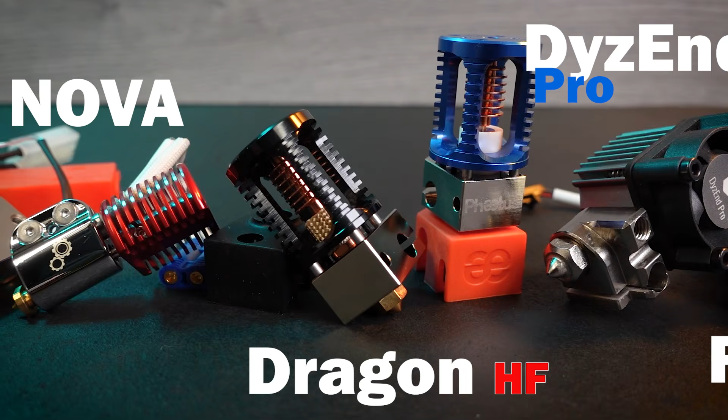We have access to a very wide selection of hot ends to serve our need for speed. But which hot end is the one you really need? From this very wide selection, it can be quite confusing to select the right one for your printer and for your needs.

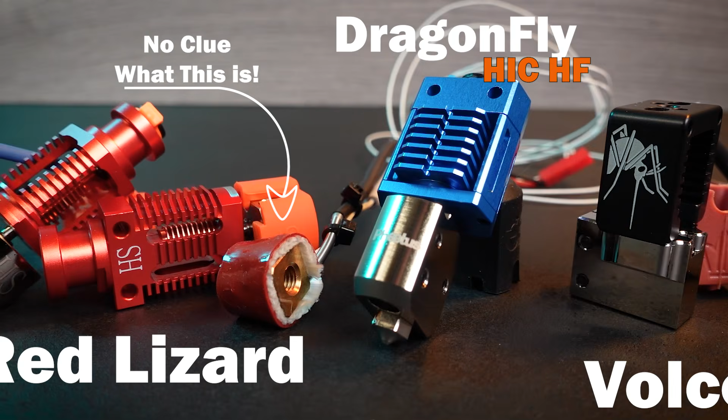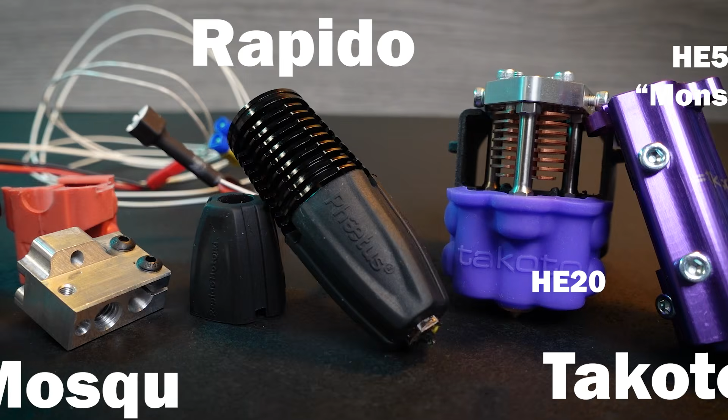Some hot ends will focus on flow, others on lightweight, small form factor, easy maintenance, and a lot more characteristics. To help you in this selection process, I am proposing today a series of videos in which I will try to identify and quantify the characteristics by which we could evaluate every hot end available in the market, and perhaps future ones also. These evaluation points should tell us more about which hot end is right for your needs.

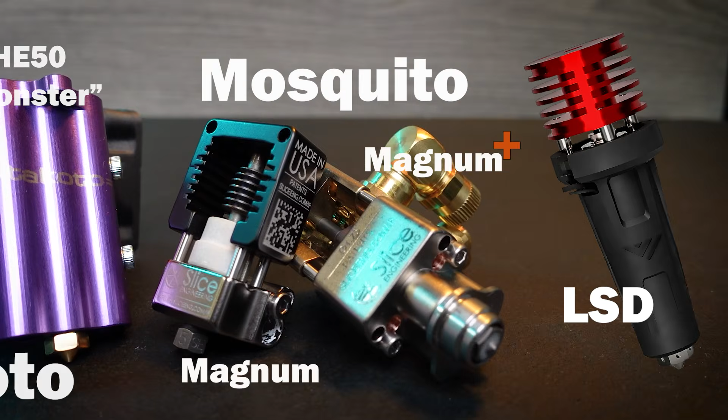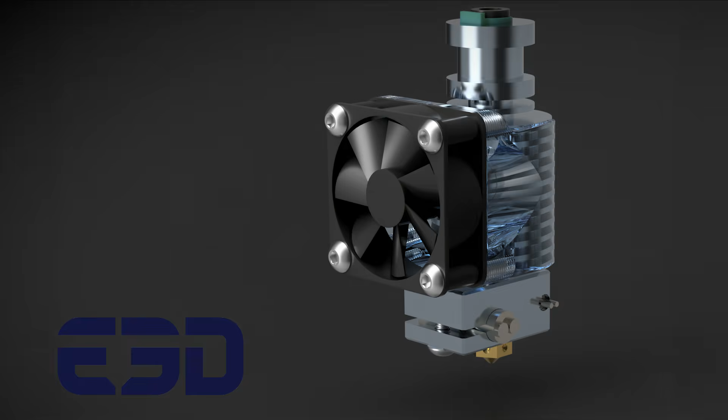For this very first episode of the Hot End Olympics, I propose that we have a look at the testing methodology and the results format. What better test candidate than the E3D V6 hot end as our guinea pig to understand and baseline each test?

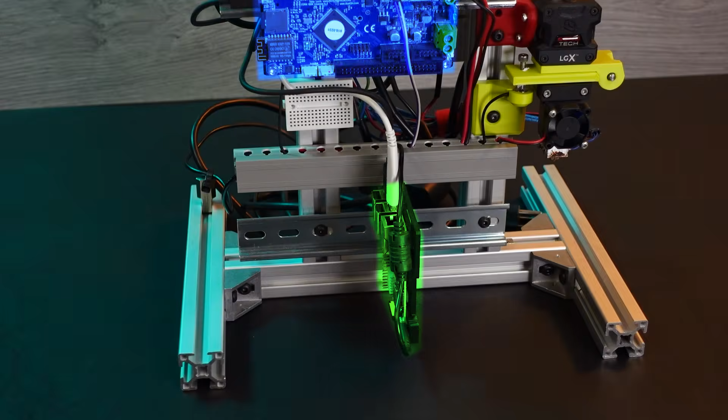Let's have a look at the test rig. The installation is fairly simple. A 24-volt power supply feeds a Duet Wi-Fi control board running Klipper. The Raspberry Pi is obviously required for Klipper, and we have right here a Bondtech LGX as the extruder. That goes for the easy part.

Then we have measuring devices. The first one is a rotary encoder to measure the amount of filament going into the hot end. Then we have right here a very precise pressure sensor that will be measuring the force at which the filament is being pushed into the hot end.

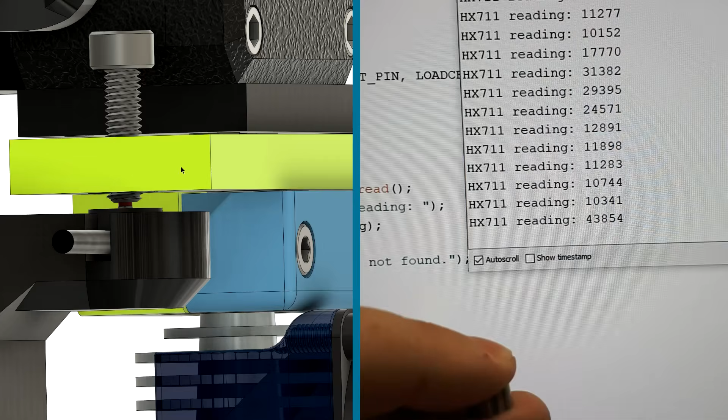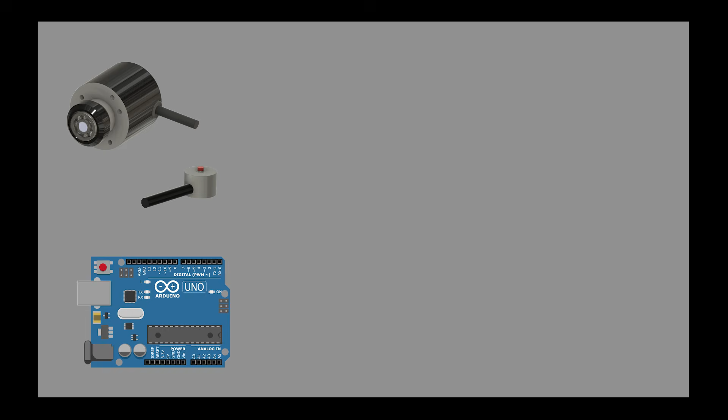The entire hot end assembly is mounted on a hinge with very limited friction for accurate readings. Both sensors' readings are then being captured by an Arduino and fed to the Raspberry Pi to be logged along with the nozzle temperature in a data table.

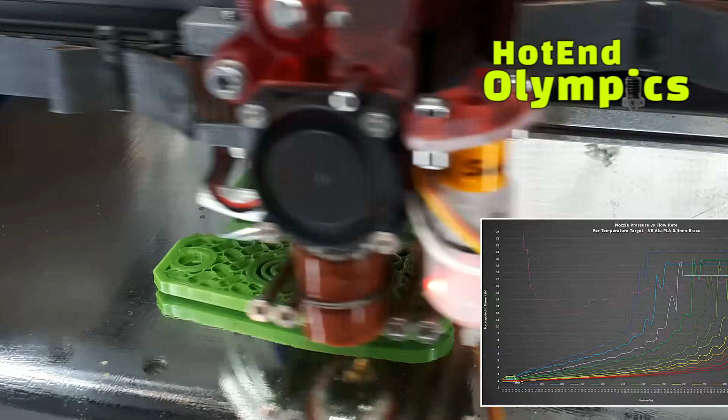Not only will it define the maximum flow under manageable pressure levels, but this test rig will also reveal stuff we never thought of or did not even believe was actually happening in our hot ends.

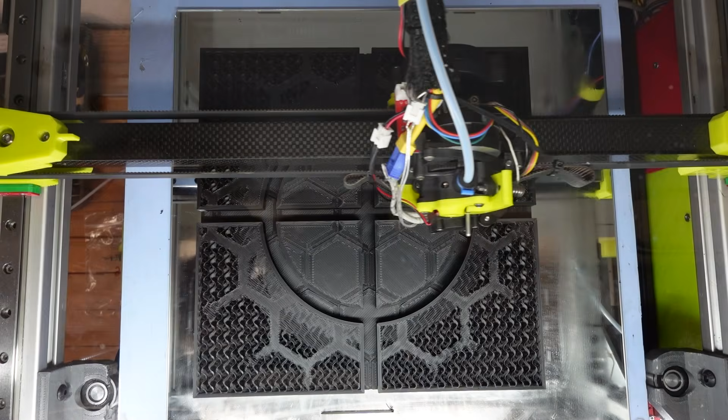Because we also need to move this entire system around the X and Y coordinate plane, we will measure its weight as well as the distance between its center of gravity and the point of fixation to the print head. With all this data in hand, it should become much easier to compare hot ends between each other.

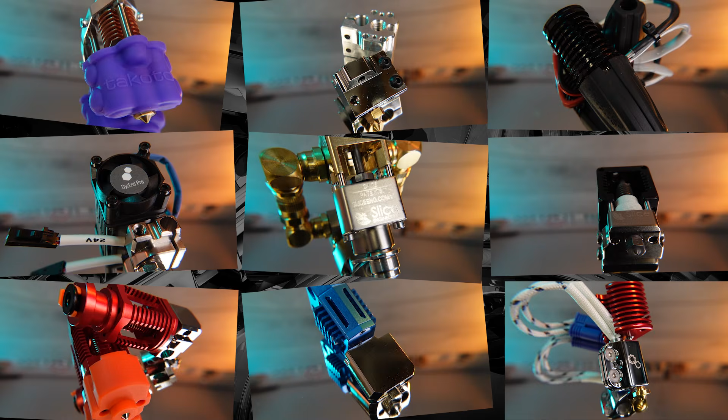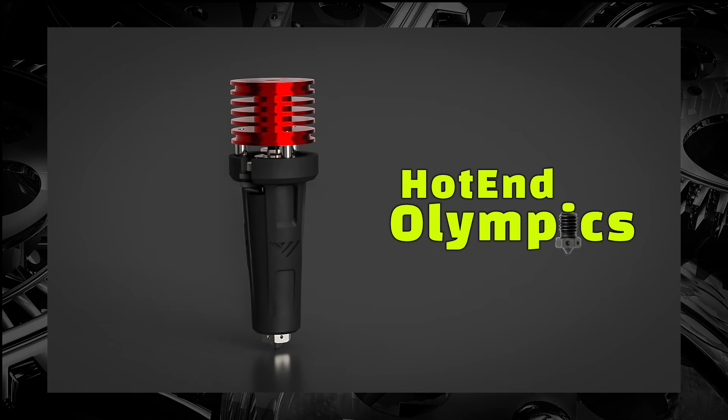Just like one of my favorite shows did many years ago, a ranking chart will be putting the winner of this competition to the top while welcoming new contestants at each episode. So let's try this testing process with our guinea pig, the E3D V6.

The V6 hot end has been E3D's flagship hot end since 2014. Affordable, efficient, and reliable, this configuration has established a standard within the industry. Any other company offering hot end products or parts had to be compatible with the V6. Nozzles, heaters, thermistors, heat breaks—pretty much every aftermarket part available today is compatible with the V6.

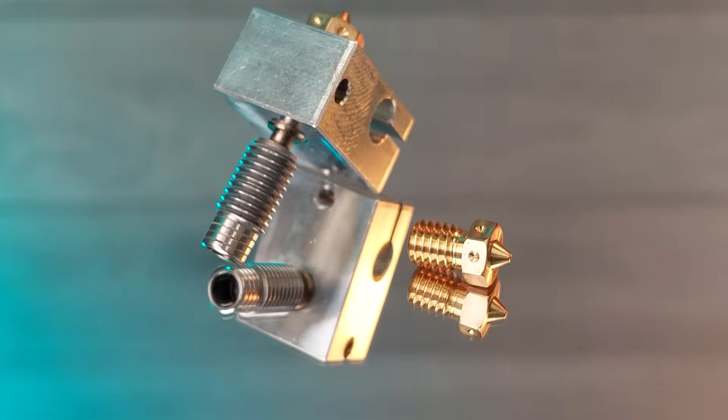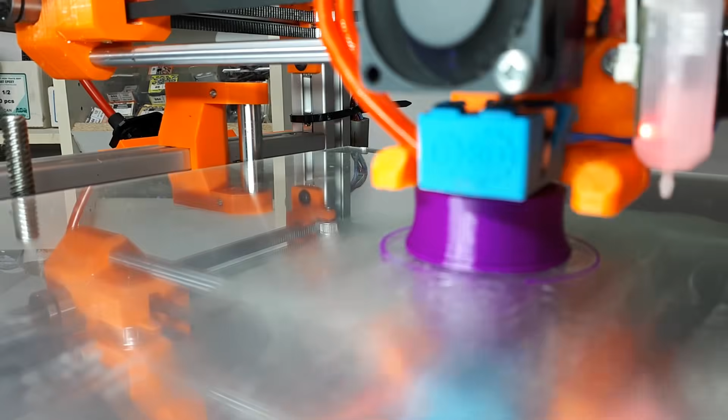Is the V6 still a good candidate for speed printing? Let's find out. The unit we're going to be using today is a pretty used unit. It has served me well on my Hypercube Evolution for years. It is equipped with a standard 30-watt 24-volt heater cartridge and a titanium heat break.

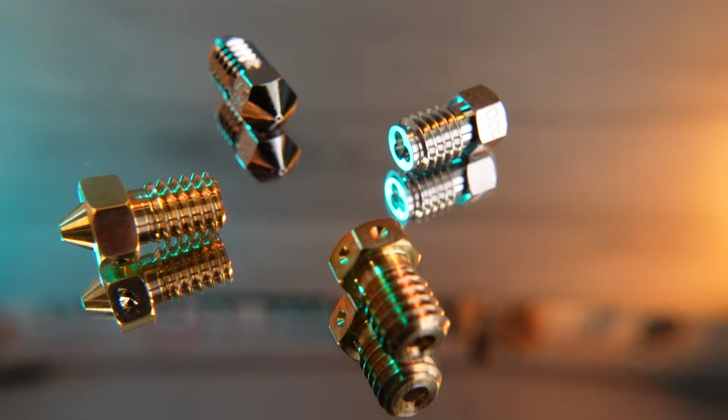We will be testing its performance sporting a 0.4mm nozzle as well as a 0.8mm nozzle later on. Before we start with performance testing, let's review the physical properties of this unit.

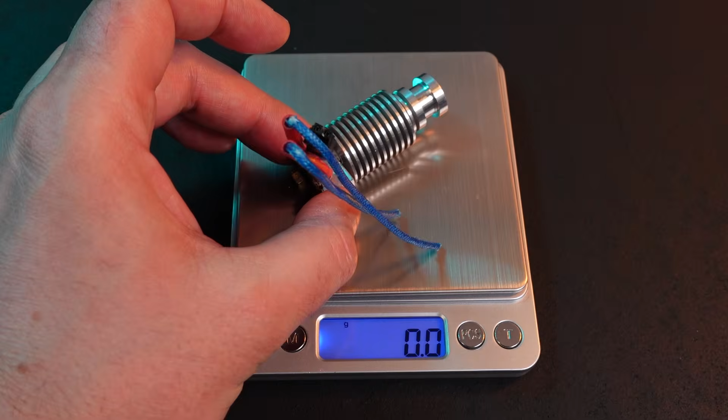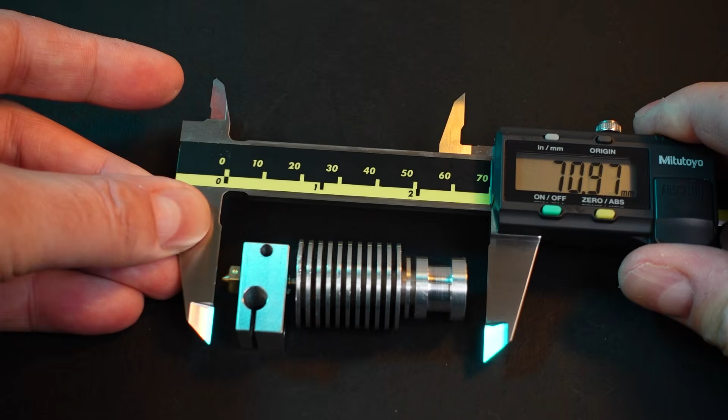All loaded with the heater, the thermistor, and some wire length, our V6 weighs just short of 42 grams. Adding the fan and shroud brings us to 56.9 grams. It has a length of 70.97 millimeters, and the melt zone measures 17.5 millimeters from the tip of the nozzle to the throat of the heat break.

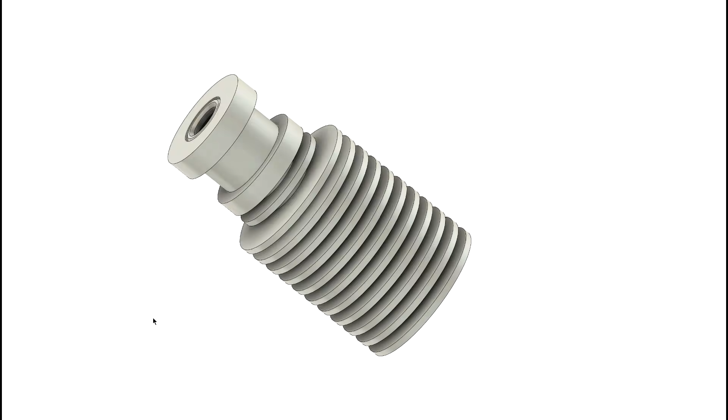The heatsink is pretty long, with plenty of cooling area within its fins, and the big 3010 fan helps a lot with cooling. The heater block is made from aluminum and is retained by the heat break only. The heater cartridge is perpendicular to the melt zone, and the melt zone is located between the heater cartridge and the thermistor.

This ensures accurate readings of the nozzle temperature.

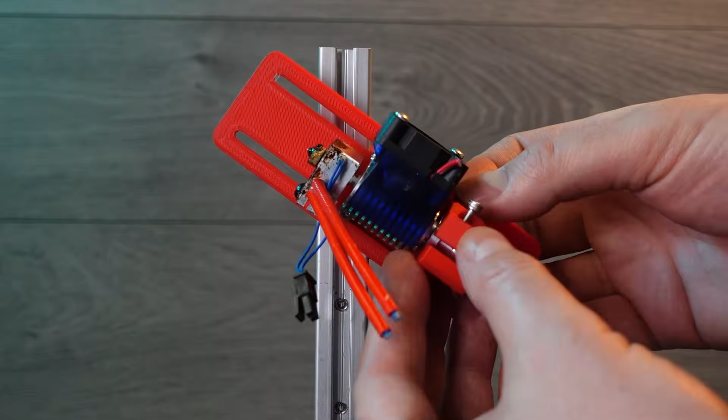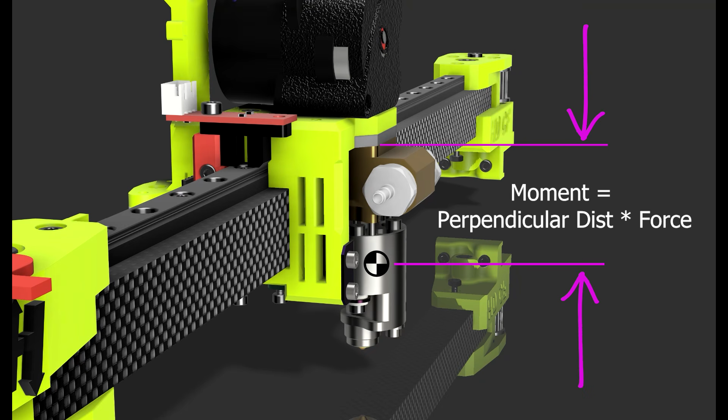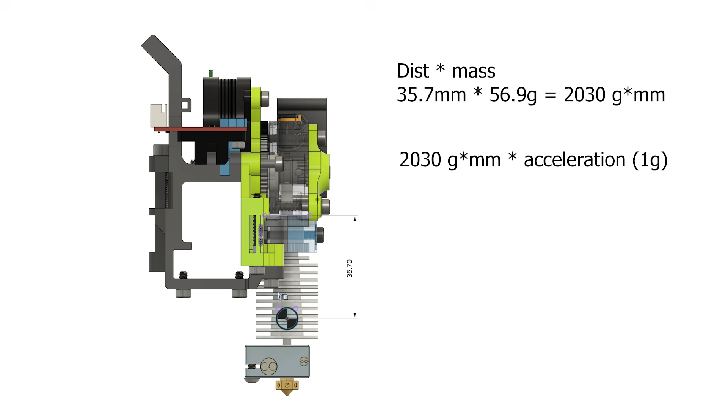By using this small jig, we'll be able to find the center of gravity of our assembly. Finding the center of gravity will help us in establishing the moment of force produced by the application of the assembly's weight on the lever defined by the distance between the center of gravity and the mounting point to your print head. The moment value obtained in Newton centimeter will give us a good basis for comparing hot ends between each other. This assembly has its center of gravity at a distance of 35.7 mm from its mounting point. Multiplying this distance with the weight of our assembly, we obtain 2030 gram-millimeter. Then converting grams to Newton and millimeter to centimeter, we obtain 1.99 Newton centimeter.

This means that under a 1g acceleration from back to front move on the y-axis... oops, sorry about that. I should remember that I'm talking to a 3D printing audience.

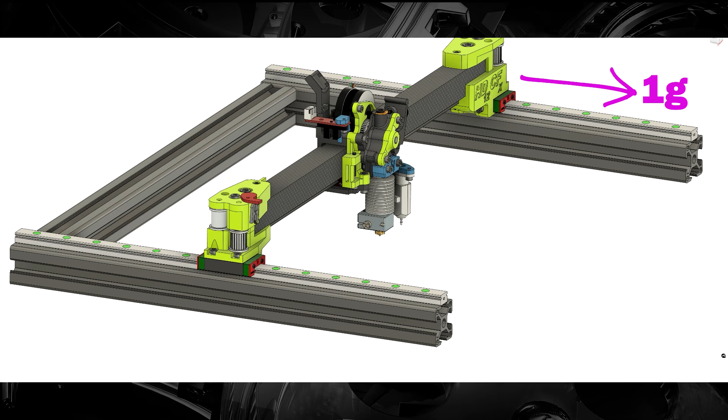Let's start that over. So this means that under an acceleration of 9,806.65 mm per second squared on the y-axis, the V6 will apply a rotating force of 1.99 Newton centimeter on its mounting point. You can now easily understand that if we increase the weight or increase the length of this assembly, we also increase the twisting forces applied to your print head, resulting in potential artifacts on corners and sharp edges during fast printing.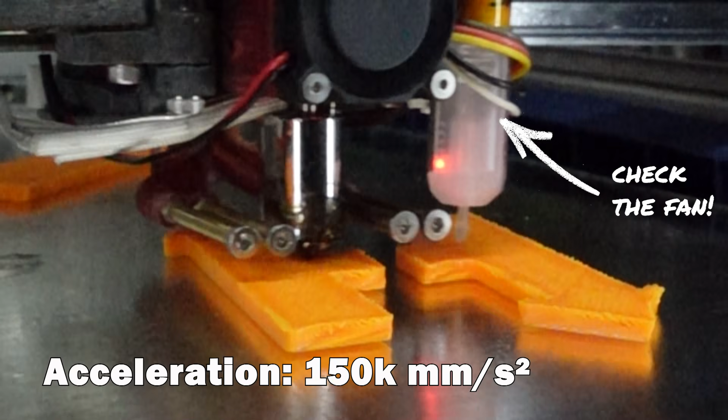And now, here comes our main course, the flow testing. The test plan is to make an extrusion run on the test rig for every 10 degrees Celsius increment. The extrusion rate will be increased progressively during each run until the extruder skips steps or when the filament starts slipping. Along with the quantity of material being extruded per second, the pressure sensor is recording the amount of force utilized to push the filament inside the hot end.

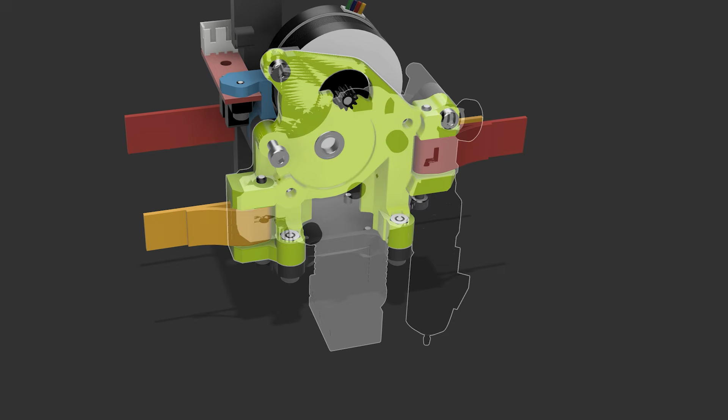Additionally, because I'm a bit crazy, and you should know that by now, and I also have way too much time on my hands, wink wink, I feel that I should also design a print head for each hot end and validate the maximum flow with actual printing. And yes, for each material and each of the two nozzle sizes as well.

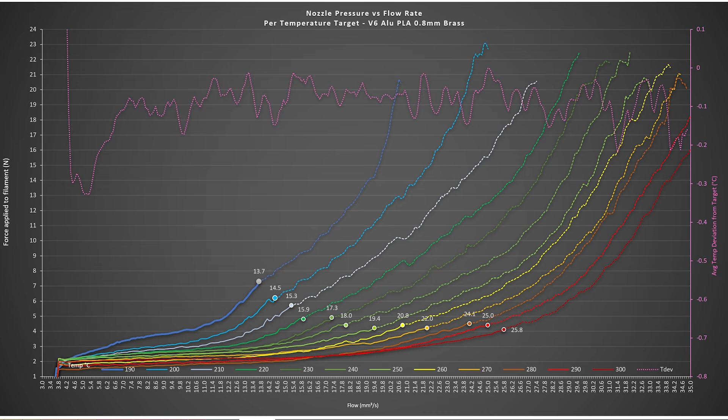The test rig conditions could be misleading under some circumstances, and we'll see why later on. The actual printing is going to help us clear that out.

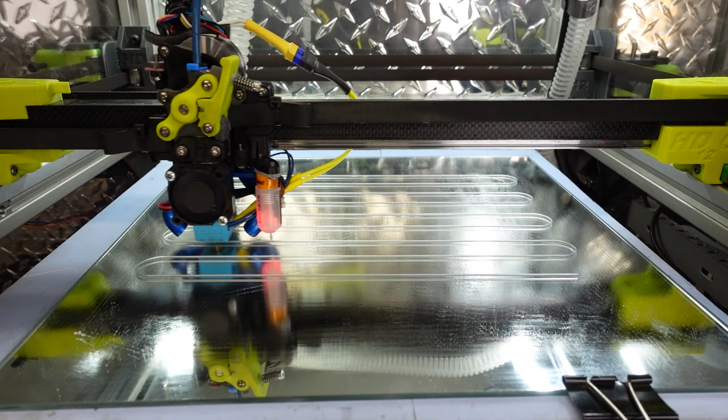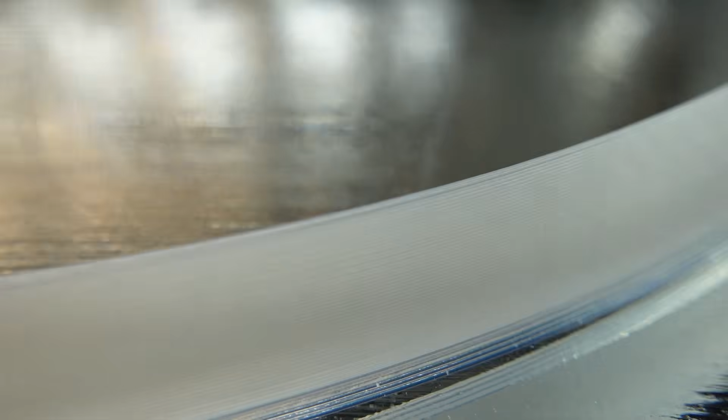I am reusing the pattern from my good old friend Vez 3D for this test. While this pattern maximizes the amount of straight lines on the same layer, it also limits the amount of flow disruption from sharp cornering, and it also allows each layer to cool properly. Thanks, Vez. The print speed will be increased at each layer until the print quality becomes unacceptable.

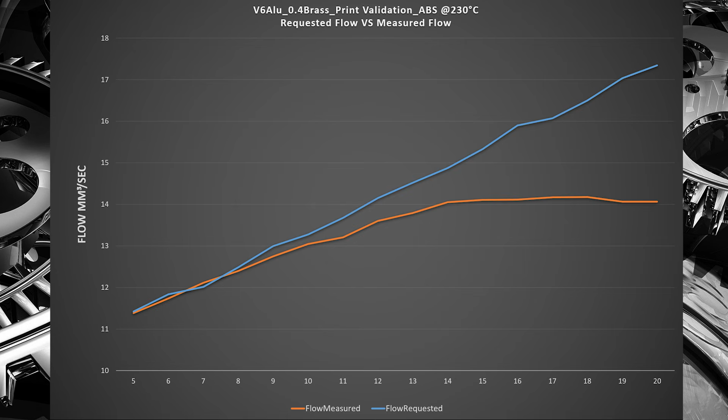The same type of rotary encoder as on the test rig is also going to be used to record the actual amount of filament going through the hot end. By comparing the amount of filament requested by the G-code and the actual amount measured by the encoder, we already have an idea of where the breakpoint will be.

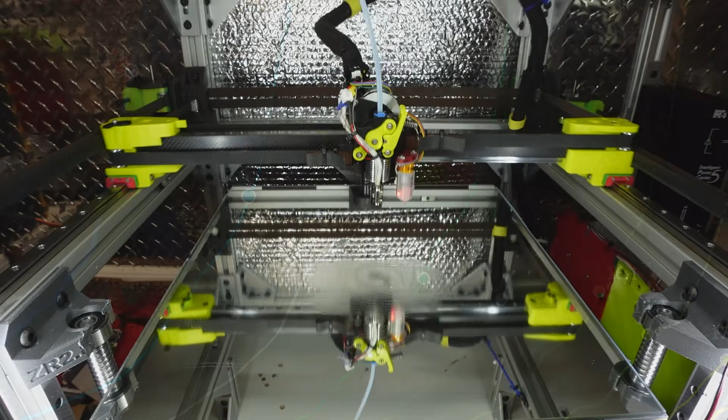Unfortunately, I did not find a way to mount the pressure sensor on the print head without obtaining too much noise and unreliable data due to the hot end swinging around under hard acceleration and direction changes. So this is something to keep in mind when we review the data.

I really wanted to test the maximum flow during actual printing to resolve a few questions that I have. Can we still print properly at the ultimate maximum melting capacity of a hot end? Will the increased pressure inside the hot end caused by the printed part partially obstructing the nozzle contribute to augmenting the melt zone height? And is there a pulling effect from the filament getting grabbed by the material previously laid, and therefore helping it get out of the nozzle?

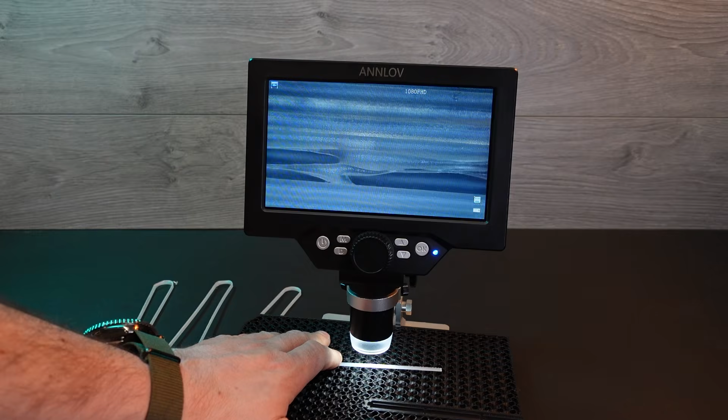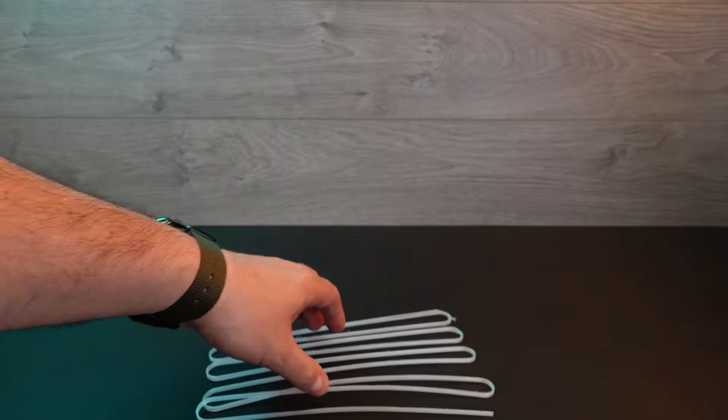I don't pretend to have all the answers to these questions yet, but I'm convinced that the observations we will be making during these Olympics will greatly improve our understanding of what's really happening in our hot ends. I will focus on these topics in additional videos that will be published between the various episodes of the Olympics to further explore or explain some of the observations made during these tests.

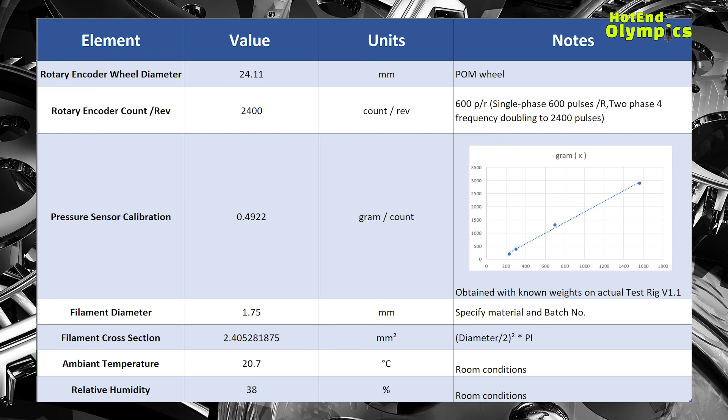Now that our test rig and printer are calibrated, and the test environment has been documented, we can dive into our first results analysis. Let's see what the V6 using a 0.4mm brass nozzle can give us when using PLA.

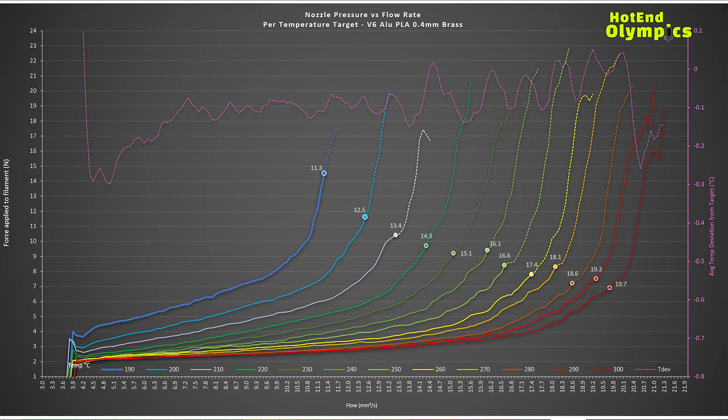There is a lot of information here, so it can be confusing at first. Let me break this down into pieces for you.

The bottom axis represents the material flow in terms of cubic millimeter per second. On the left axis, we have the amount of pushing force applied to the filament. This force is expressed in terms of newtons. On the right part of the graph, we have a second vertical axis. This one represents the average temperature deviation between the targeted nozzle temperature and the actual measured value.

The pink dotted line here shows this temperature deviation in relation to the flow obtained. The dip at the beginning is normal. It is simply due to the fact that the nozzle temperature was stabilized at the targeted value before the test started.

We can then see the controller board trying to maintain that value as stable as possible using its PID algorithms as we push more and more filament. It tends to keep the temperature slightly under the target, probably because we are constantly increasing the flow of material to be heated up. The oscillation at the end indicates that the heater has a hard time to keep up. The PID tune is probably not optimal for this flow, and the dip at the end probably indicates that we are outrunning the heater's capacity.

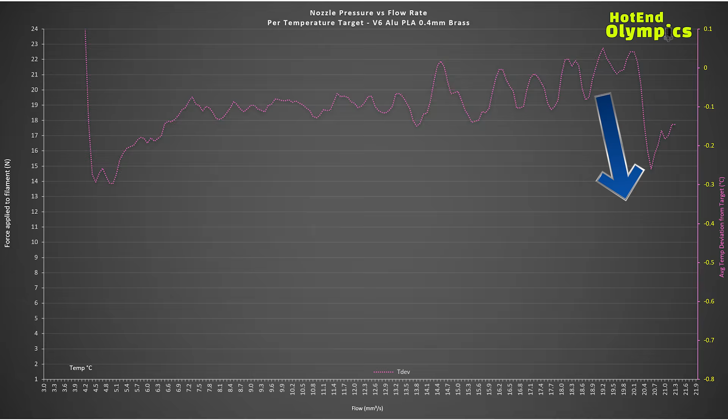Let's turn on the test sequence performed at 220 degrees Celsius, which is a pretty common printing temperature for PLA. As we increase the amount of filament pushed, we can see that the force applied by the extruder on the filament is also increasing. This means that the pressure inside the hot end is increasing as well. So far, we have a pretty linear pattern, which indicates a stable and predictable situation.

Let's see what happens when we try to increase the volume of filament pushed furthermore. We're reaching a point where the pressure starts to climb much more rapidly, until we have an almost vertical curve. If we were to try exploiting this range of flow at this temperature on this hot end, we would get an erratic extrusion flow very difficult to properly predict, therefore throwing out of whack your retraction and pressure advance settings.

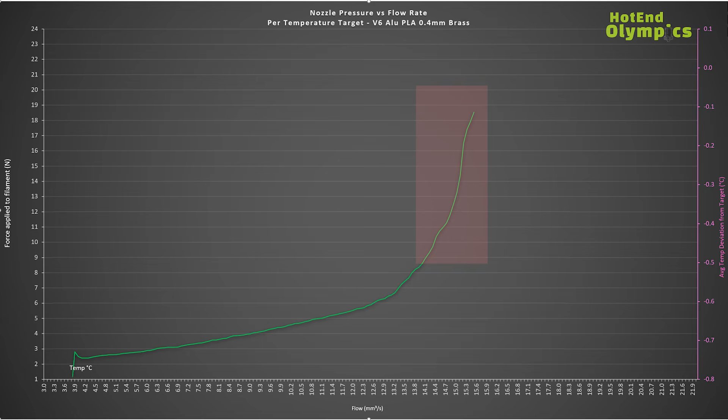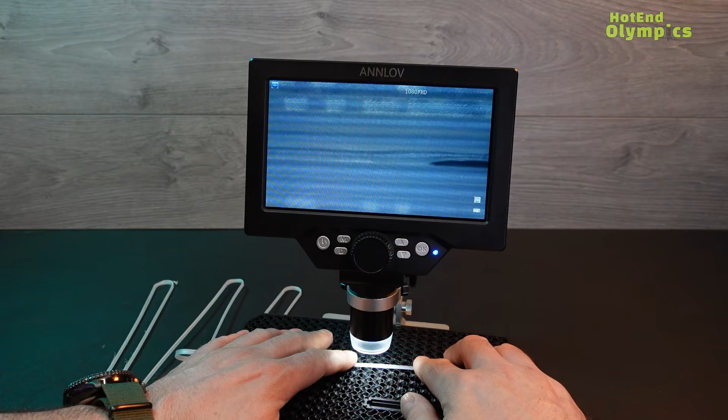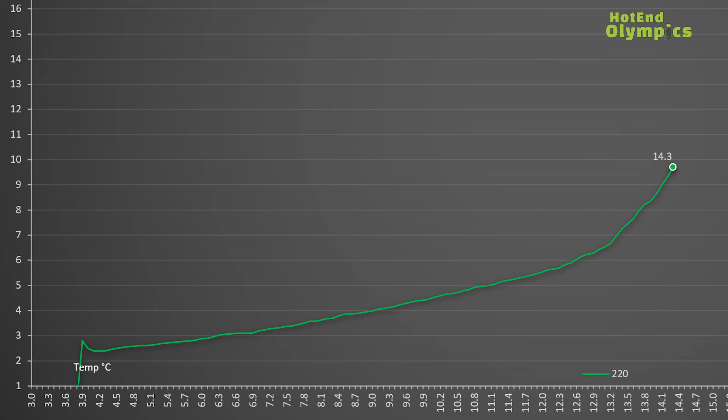By measuring the last height of our test profile that printed correctly, we can then pull the readings from the rotary encoder. It is too bad I couldn't find a way to obtain reliable data from the pressure sensor when mounted directly on the print head, so we will simply report the maximum printing value on this graph, knowing that the pressure profile might be slightly different when printing for real than what it showed on the test rig.

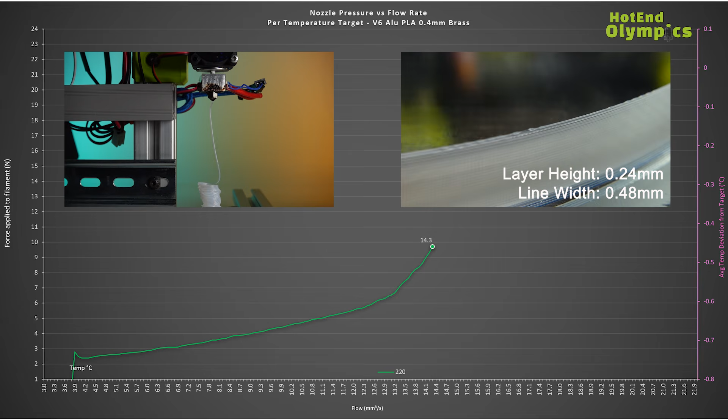So at this temperature of 220 degrees Celsius, the last layer that printed correctly corresponds to a printing flow of 14.3 cubic millimeters per second.

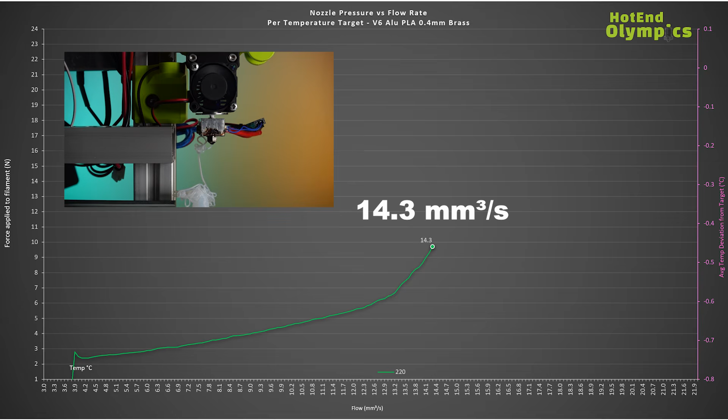This maximum printing flow value corresponds directly to the area of our test rig curve where the pressure was starting to creep. This means this testing methodology might be working after all. The rest of the curve from that point on will be dashed to indicate the non-printable zone.

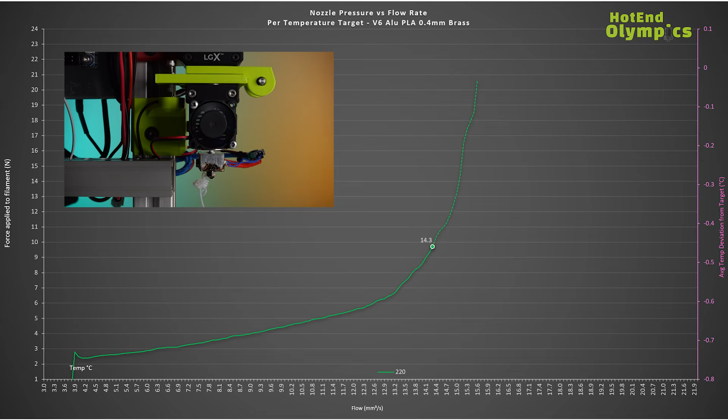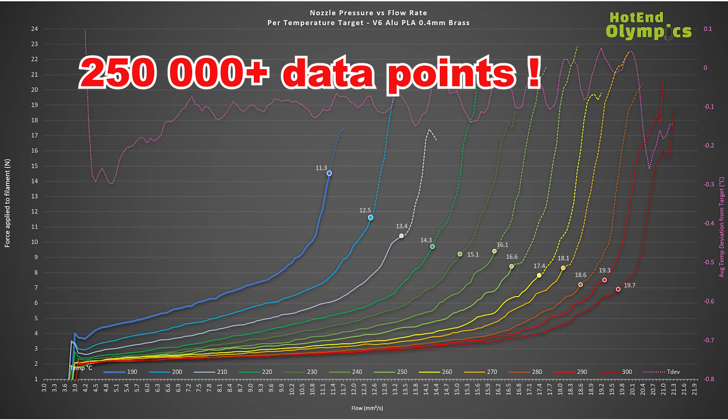Let's turn back on the other test sequences done at other targeted temperature values. What a cool graph! More than 250,000 data points were used to create this image. Crazy when you think about it.

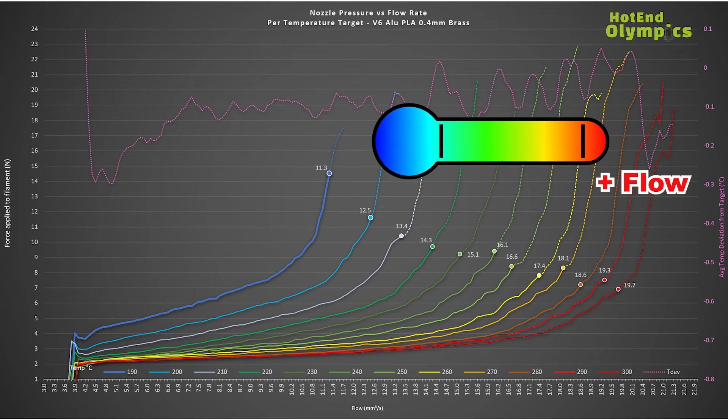So let's take a step back. What can this graph really tell us? It is clearly visible that more heat will increase the allowable maximum flow of our hot end. Given that we can properly cool the filament after being extruded, we could gain a lot by printing hotter.

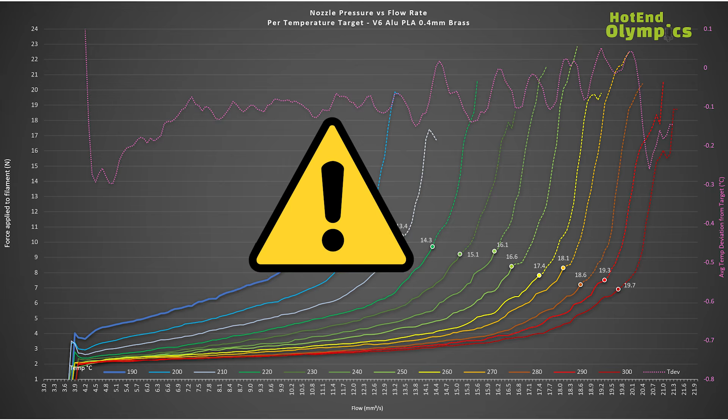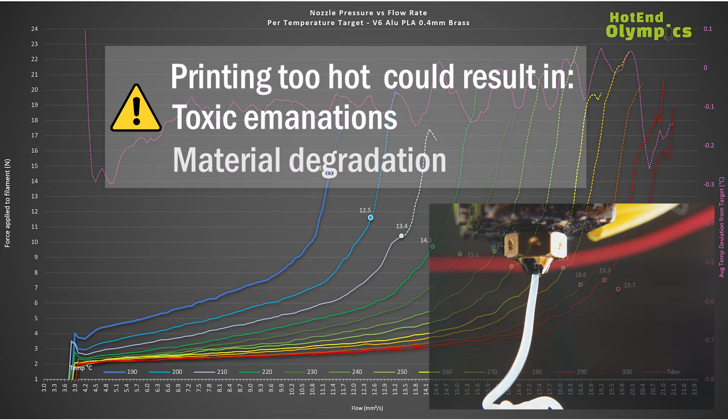But be careful. Printing a material at a hotter temperature than the value recommended by the manufacturer could mean two things. First, you'll start to get more undesirable toxic fumes. And second, you'll potentially be degrading the physical properties of the filament. This could mean weaker parts.

The pattern traced by those maximum printing flows reminds me of something. Do you see it as well? Yes, the max torque per RPM for our little NEMA 14.

We could potentially be able to obtain a bit more flow for this filament by using a stronger stepper motor. But then again, the gain wouldn't be much as the pressure creep zone is still around the corner for every single one of those points.

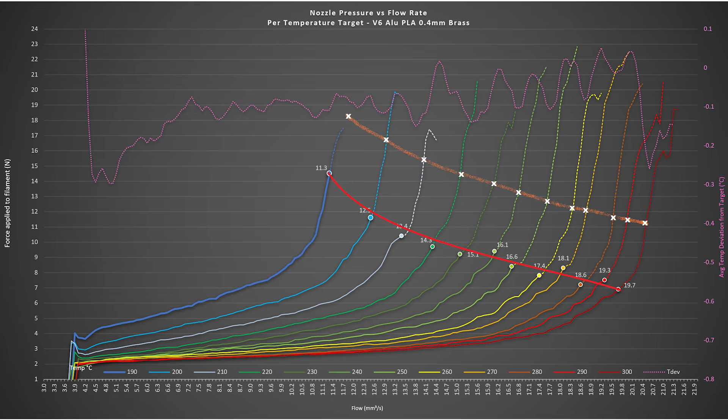Because we need to pick one value for our wall of fame, we will use the flow obtained at 220 degrees Celsius, which is the maximum recommended temperature for this PLA. Along with the maximum flow, this wall of fame will also list the physical properties of each unit. This way we can easily compare all hot ends based on different factors.

Our V6 using a 0.4mm brass nozzle has a total weight of 56.9 grams. The center of gravity is positioned at a distance of 35.7mm from the mounting face. This produces a moment of 1.99 Newton centimeter.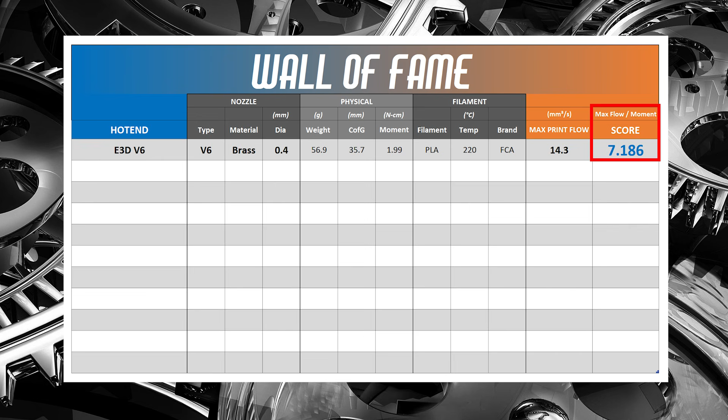A maximum flow of 14.3 cubic millimeters per second was measured via actual printing using Filaments.ca EconoFil natural color PLA at 220 degrees Celsius. I will take a stab at creating an index using the maximum flow divided by the moment. This index will be used to compare and rank hot ends between each other by considering their physical properties as well as their maximum flow capacity.

It might not be the best way to do it, but we will readjust as required along the way of these Olympics. Having the data in hand gives us such flexibility.

Please remember that I'm learning just as much as you guys in this adventure.

Let's stick with PLA for a moment and see how a 0.8mm nozzle will affect the results. Although the pressure curves from the test rig are shooting through the roof of flowing capacity, the actual printing maximum flow is considerably lower, just a little bit more than what we got with our 0.4mm nozzle.

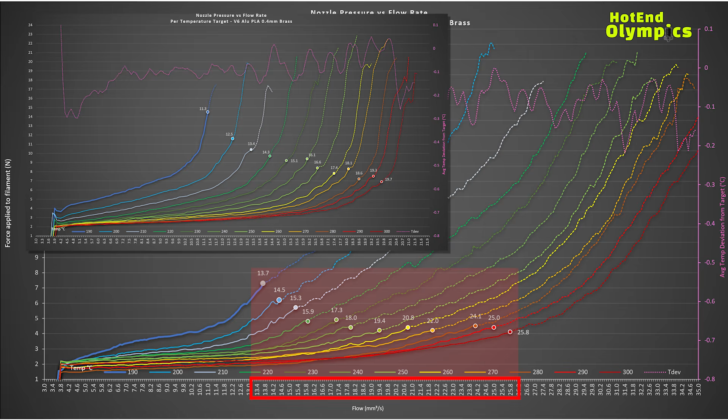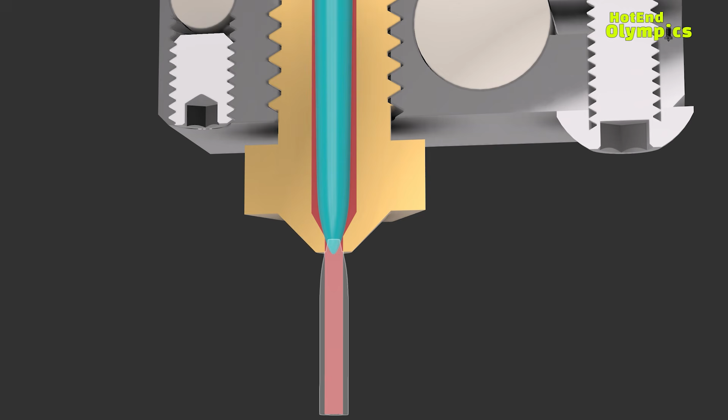The explanation for such difference between mid-air extrusion and actual printing results is caused by cold core extrusion. What is that? When reaching a certain pressure level inside the nozzle, it becomes easier for the unmelted center of the filament to simply deform, stretch, and squeeze through the bigger nozzle hole than it would take to block the nozzle and create enough restriction and pressure to eventually stall the extruder motor.

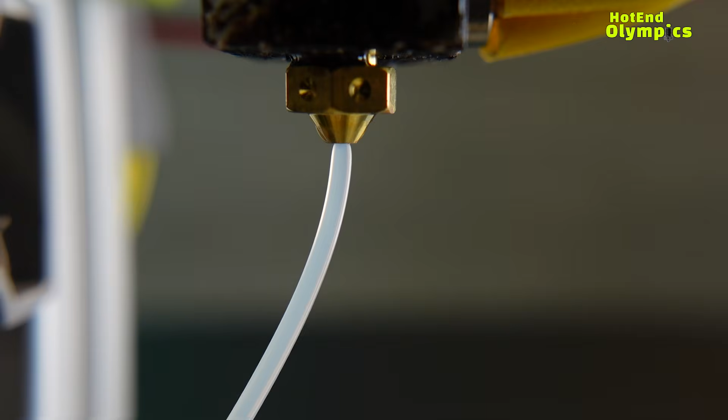We can observe and confirm this phenomenon by measuring the filament after extrusion. The filament gets swollen right after exiting the nozzle. This 1.58mm extruded piece was created using a 0.8mm nozzle. There is definitely an elastic motion happening here. Another way to observe that phenomenon is to look at the cross-section from one of these swollen extrusions. See the different texture from the center of this piece compared to its surrounding.

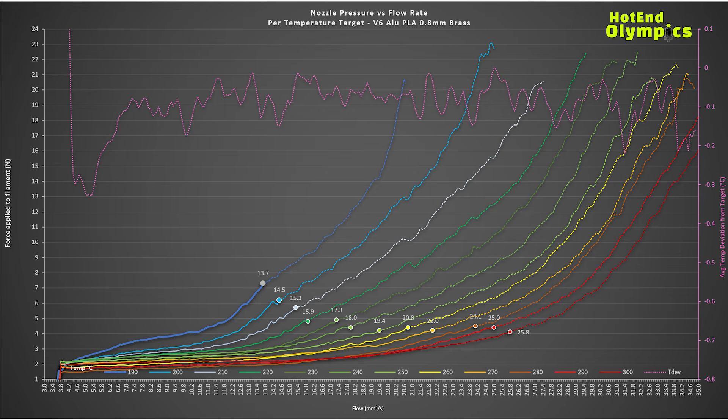For this reason, it became clear to me that actual printing was required to establish the real flow capacity of a hot end. I have used a line width of 1mm and a layer height of 0.48mm with this 0.8mm nozzle. There might still be some of that cold core extrusion phenomenon happening, but I evaluated this to be minimal since we are within reasonable range of the results obtained with the 0.4mm nozzle.

Now let's see how changing filament material affects the results. This is now ABS, a completely different pressure profile for this material. I could not get the test print to work below 220 degrees Celsius with the ABS due to bed adhesion issues. This is why the lines are completely dashed for the temperature curves below that point.

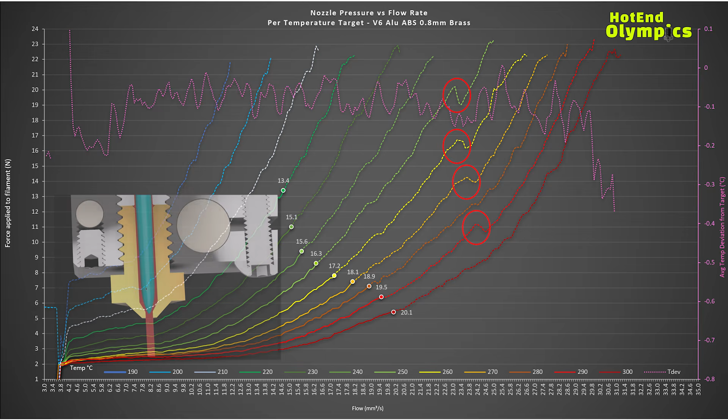Although we can see that ABS pressure progression curves are smooth and much more regular than what we saw with PLA, there are some things I cannot explain yet, like these spikes repeating through several test runs when using the 0.8mm nozzle. They might be related to the cold core of the filament making contact with the taper surface of the nozzle. If you have hypotheses that could explain these behaviors, please leave a comment here below. I'm eager to read these results through a different eye.

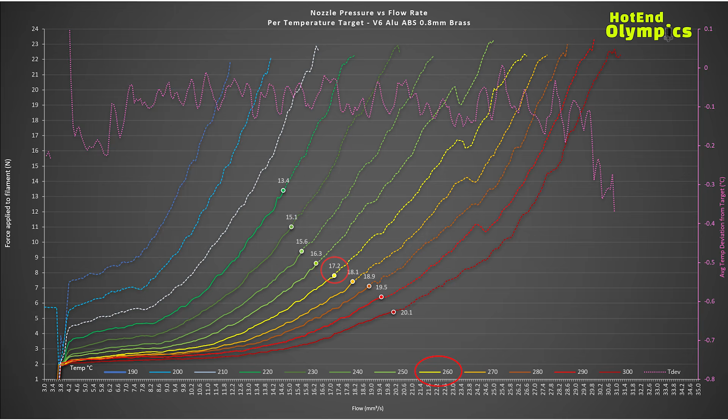We will use the maximum printing flow at 260 degrees Celsius for ABS. So using a 0.4mm nozzle, our V6 has a throughput of 15.1 cubic millimeter per second. And when using a 0.8mm nozzle, this maximum printing value becomes 17.2 cubic millimeter per second.

Last material, PETG. PETG is perhaps the more flexible and elastic filament from the three we are using in these Olympics. The pressure curves are pretty different from PLA and ABS. I suspect the more erratic and harsh texture of the curve is created by the filament taking the shape of a snake or a coil in the hot end under the push from the extruder motor. I could be wrong, but this is the only thing that makes sense to me right now.

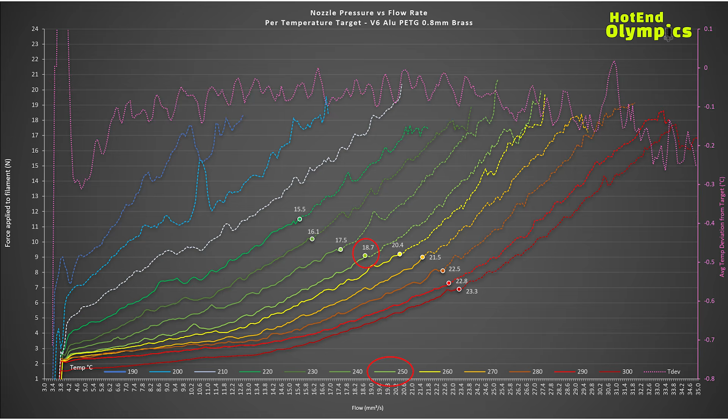Because we can only use one temperature value for our wall of fame, we will capture the maximum flow at 250 degrees Celsius. This is the temperature that I found to work best with this PETG 3D fuel filament. So we will grab 13.3 cubic millimeter per second for this 0.4mm nozzle using PETG, and we will use 18.7 cubic millimeter per second for the 0.8mm nozzle. Do you see the bigger difference between the results of those two nozzles?

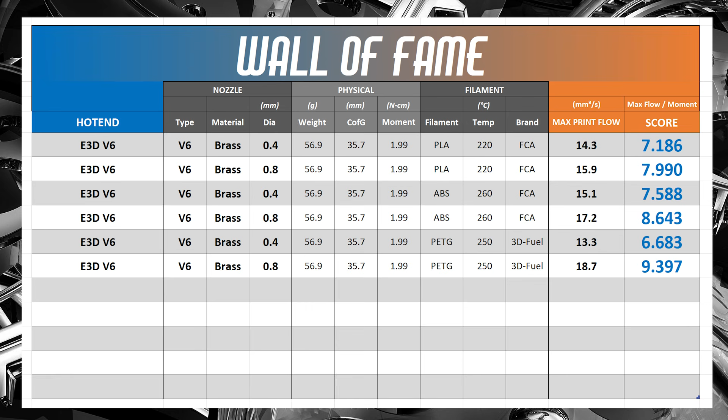Could this be related to using a more elastic material? How are these results talking to us? How will we be able to compare hot ends between each other using this table? Once again, I don't have the answers to all these questions yet, but I am sure that as we go through these Olympics, we will learn a great deal about what is really happening in there.

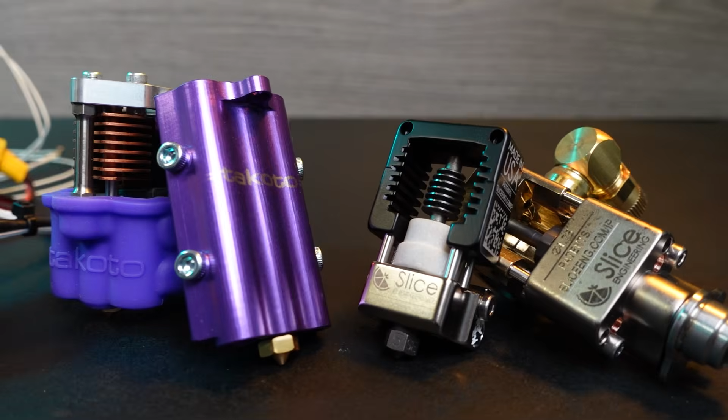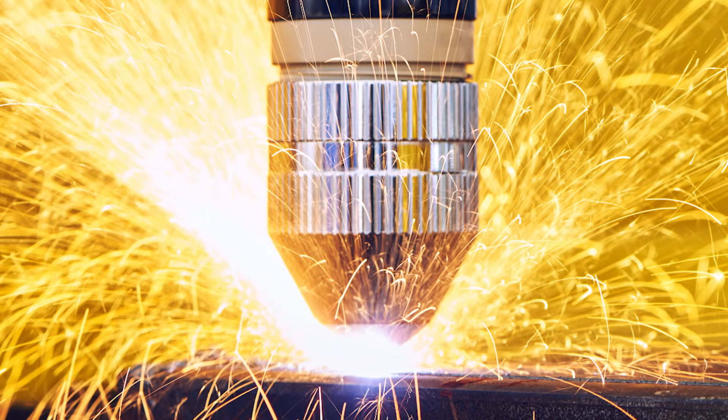I hope this data will help in moving the open source community forward. Who knows, perhaps one day we will be printing with hot ends lighter than the tip of a pencil that have a maximum flow of over 100 cubic millimeter per second. Until then, see you soon on the next episode of the HotEnd Olympics.